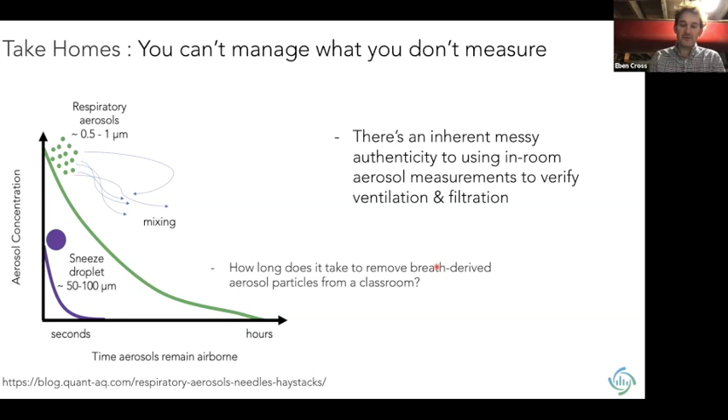It says the room is this big, the ventilation system is delivering this much air, it's removing this much air. You do some arithmetic and you get an answer, and it says the air change rate is X. I've found that by actually going into that same room and measuring how long it takes particles to leave, you often learn that the reality is different than the theoretical calculation. So the question is, what can we do about it?

So we built a technology called MODULAIR-PM, and it's just a PM sensor. I don't want to get bogged down in the details, but this thing is capable of telling me how many particles there are suspended in the air in that room, and also what size they are. So we can begin to differentiate those sneeze droplets from the breath-derived aerosol from the background pollution particles entering a space. That's quite helpful because each one presents a different removal target for us.

We want to take this same tech and put it into a classroom. I don't know if you guys can see my video, but this is one of the units. It's relatively small and unobtrusive, about 10% of the size of the printer in this picture here. That unit's been running in my daughter's first grade classroom since September of 2021. So arguably, this is one of the longest running continuous aerosol measurements in a real world classroom to date.

But if we think theoretically about that room and simplify it a bit, we can begin to think about the confines in which we want to define the problem. Really, this comes back to people inside a room - they generate a ton of CO2, and they also release respiratory-derived aerosol. If we were to measure the CO2, which is basically taking the world by storm thanks to Aranet's technology, we will see the rise and fall of that CO2.

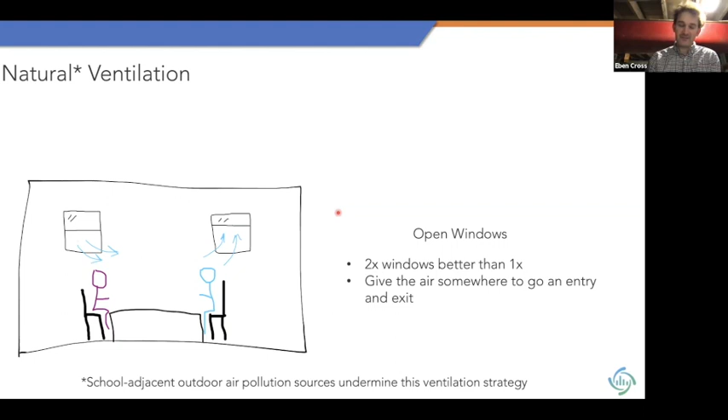And this is the vast majority of schools in America - they only have this at their disposal. They do not have mechanical ventilation. Now, when you add a mechanical ventilation system to this room, you get a little bit more of a closed system, and you should actually know what's going on.

This helps us relate some metrics within the ventilation system to what the air change rate should be, right? And hopefully that ventilation system embeds things like MERV 13 filters, which are decently good at filtering particles in a way that is dramatically improved over MERV 12 or MERV 11. I know in the UK you have different filter designations that Reese and Stefan can school everybody on. I don't actually know how these things link up, but I encourage you to reach out to them to know precisely. So we need that filtration layer, and we're pumping air into this room.

We can end up coming up with a theoretical air change rate based on the size of the room and the rate with which we're pumping air, positive pressure flow, into the room. So for this room, we're going to hypothetically say the air change rate is 6. All that is the total amount of air being pumped into the room divided by the volume of air held within that room.

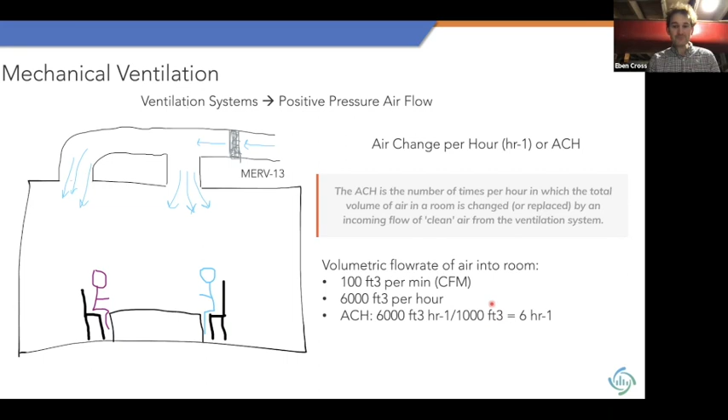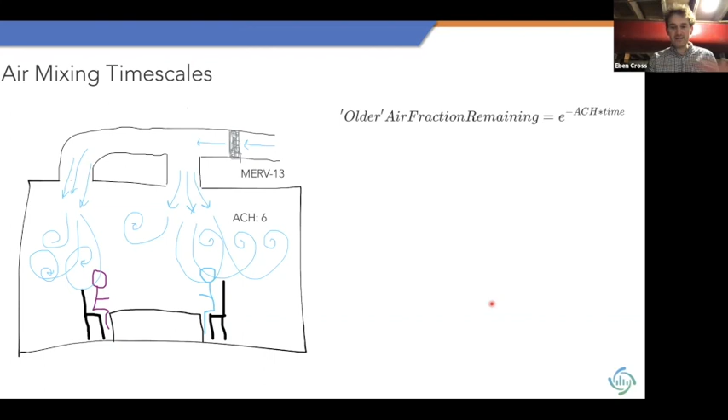But if we think about it, air doesn't move like toothpaste through a tube. Air mixes all the time. One of the confusing things about ventilation and removal rates is this mixing. And because it's constantly mixing, it doesn't decay in a linear fashion, it decays in an exponential fashion. On a graph, that means over time the fraction of air exchanged goes down something like this green curve, or you can think of the input of fresh air into that same room going up like this blue curve.

So in this case, our 6 ACH - and by the way, 6 ACH is the target for all school classrooms. The reality is in America it's closer to 1 or 2 ACH. But even in a case of 6 ACH, it takes 30 minutes to clear the room of 95% of the air. So we're looking at half an hour to get to 95% clearance because of this mixing, if the room had an ACH of 6. So 30 minutes is essentially the best case scenario we could offer our kids globally.

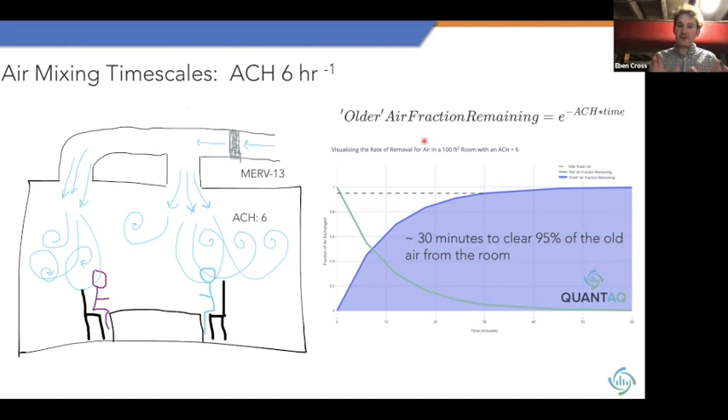So the question is, how do you get to 6? This gets into the concept of using aerosol measurements to understand the room a little bit better. One way we can leverage those aerosol measurements is we can add a humidifier to this room, a little droplet humidifier, and you can create an aerosol distribution that includes particles overlapping in size with the things we're trying to understand the removal timescales for. And then we can use that data.

So I'm plotting the actual number of particles in each cubic centimeter of air when that humidifier source is on - these are the droplets being generated by the humidifier. I'm using the system to count up only the particles in one size bin, the particles between 350 and 460 nanometers. These are pretty small particles, and they tend to overlap with that respiratory aerosol distribution, at least the smaller size tail of that distribution. But the key thing is we can use that data to calculate how long it takes those particles to go away in this specific room under these specific conditions.

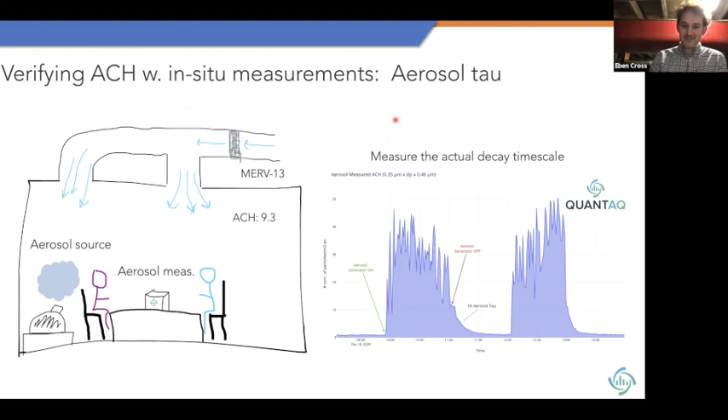You'll note I changed the ACH here to 9.3, because I did this exact experiment in an actual room, with an actual back-of-the-envelope calculation based on the theory of the ventilation system. But because I have that empirical measurement, I can then actually move forward if my slide was capable of moving forward. Oh, technology.

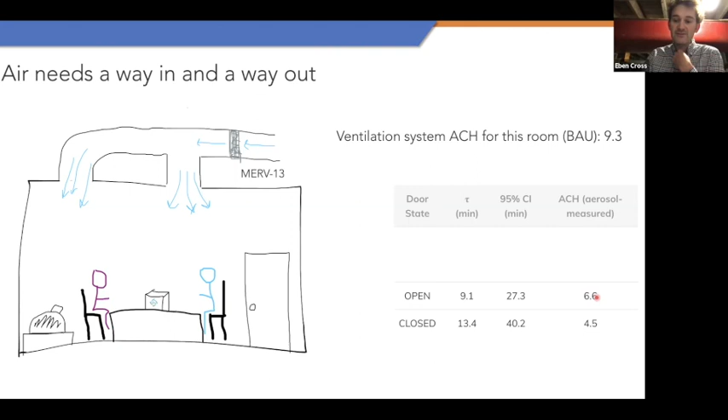There it is. And we can actually ask ourselves, did we get to that business-as-usual 9.3 for an ACH? When I actually measure the ACH, if the door is open, this room gives me an ACH of 6.6. If the door is closed, the ACH is 4.5. So we're literally missing the mark here by 30 and 50% respectively. And it's telling me that leaving this door open to this particular classroom is incredibly important, right? So we have to think about this in terms of the practicalities of the disconnect between what the ventilation system says is happening versus what's actually happening inside these rooms.

So this is just highlighting the reality - if we make the measurement, we can really firmly understand and trust that removal timescale, and potentially do things that are accessible, like opening and closing a door, that can in fact have a fairly dramatic impact on the ventilation rate.

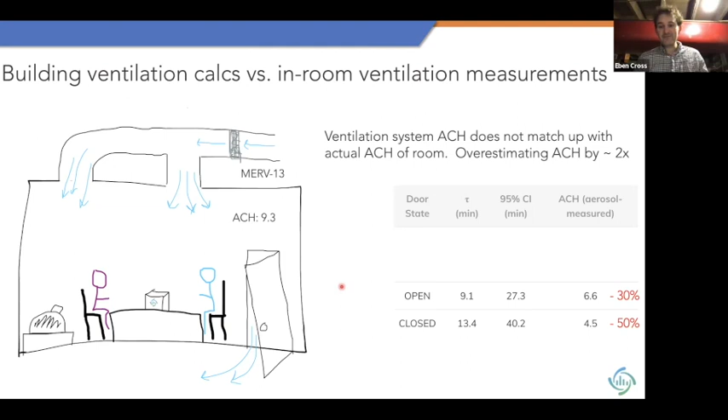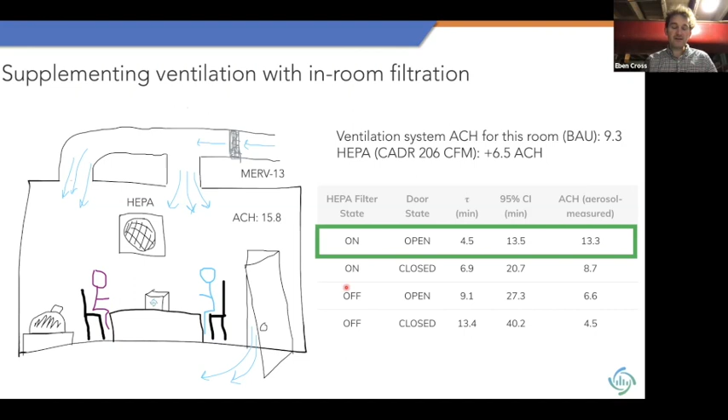The other thing I did in this experiment is I added a HEPA, a wall-hanging HEPA, not a CR box. The HEPA is supposed to theoretically add another 6.5 ACH to this room based on its operating conditions, meaning I should be able to hit this target within this specific room of 15.8. You can see we get pretty close. The HEPA actually does operate to spec if we leave that door open. If we leave the door closed, we really aren't even getting close to that theoretical ACH with the addition of the HEPA. So all I'm saying is, we have these things at our disposal, and thinking about how air enters and leaves a space plays a key role, and making measurements allows us to understand what's going on in reality.

So with all that as context, we want to move towards how do we maximize the in-room filtration of particles, whether they're from pollution or from people, and empower people and communities who are generally under-resourced to minimize their kids' inhalation risk and dose.

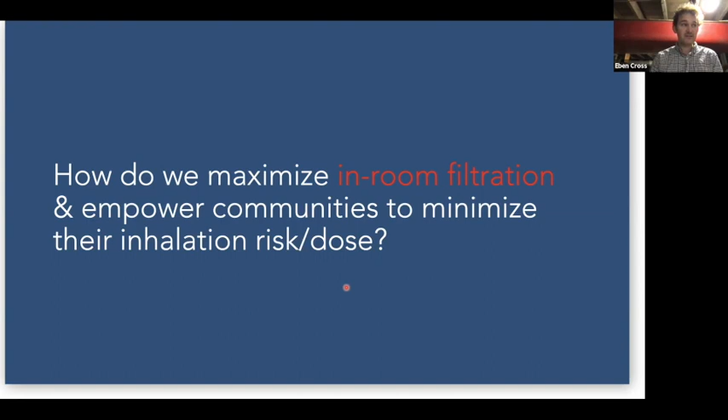I think the bottom line here is that what has happened with this Corsi-Rosenthal box, what I call the Corsi-Rosenthal box revolution, is a perfect example of accessible science. Frankly, I legitimately think accessible science is best drawn with fat crayons and modeled with Lego, because we don't need to make this complicated, scary, or intimidating. We can make it accessible, we can make it affordable, and we can deliver ridiculously high clean air delivery rates with these devices.

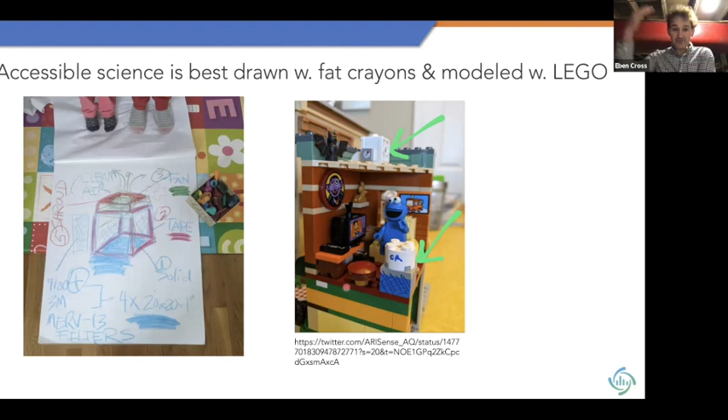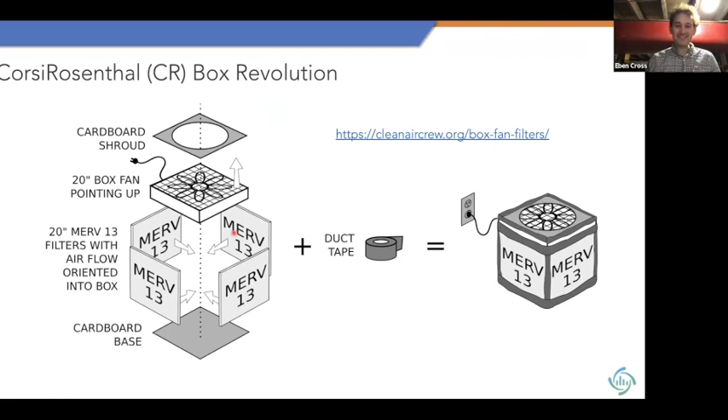That's pretty awesome. What makes it even more astounding is if you take that system into a lab space. So this is me taking the thing that me and my kids bought and bringing it to my lab. In my lab I have a chamber that's like a simulation room, and in that chamber I can create and sustain really high concentrations of the target aerosols we're trying to filter. We're plotting the total number in one of those size bins, and watching what happens in the chamber when I have a constant aerosol source, and then what happens when I turn on the CR box at different speeds.

One of the questions we have with the intervention is: is it going to make so much noise that nobody ever uses it? Frankly, if you run a CR box on medium or high, the answer is yes—it's too loud, people will never use it. If you run it on low, it'll actually be fine, so we should focus on the benefits we get when running these systems on low. In this experiment, I wanted to emphasize that I'm getting two pieces of information every time I turn the CR box on.

Eben, you've got a question. Sarah's interrupting you. Sure, can I interrupt?

Thank you. So when you say not too loud, can you give me an idea of what not too loud is? Is this hair dryer loud, or what do you mean? So it gets back to the question that Stefan's done a ton of research on—decibel levels and how to get them quieter. It's in the vicinity of 49 to 50 dBs, which is background noise unnoticeable in the context of a first grade classroom. I walked into my daughter's open house two days ago and could hear the $700 HEPA, which was on high, loud enough to hear across the room full of adults and kids. But the Corsi-Rosenthal box, on the other corner of the room, was completely inaudible, but it was still running on low. So the thing is, it's not noticeable.

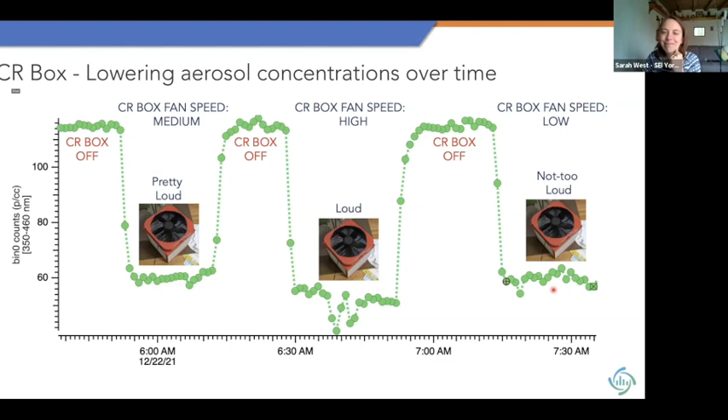I actually think this graph can be a little confusing, but I wanted to help you understand there's two pieces of information I can get from that experiment. I can understand what fraction of the particles were trapped by the filter, or removed, as a function of the size of those particles.

Somebody raised their hand. It was more of a question on the noise again. I wondered, the fact that we're using an axial fan here, the action is to move air through a filter, but because these fans are designed to move air through vents which have very little resistance, I wonder if the noise might be reduced by using a different kind of fan.

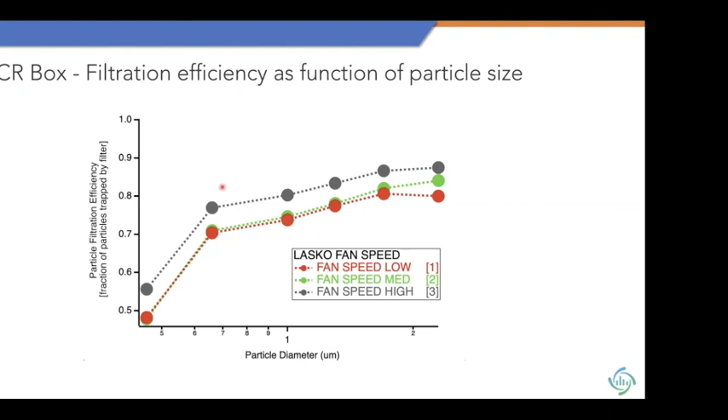The fan I mentioned in the last talk was the centrifugal fan, which is kind of like a mill that's powered by a river. The fan blades are perpendicular to the flow. This is potentially much quieter than an axial fan because it's not chopping through the air, it's pushing the air, and it might be more efficient.

I think generally, whatever fan is operable, quiet, and moves a ton of air is the winner. I don't care what kind of fan gets integrated, as long as the device is used, that's a win.

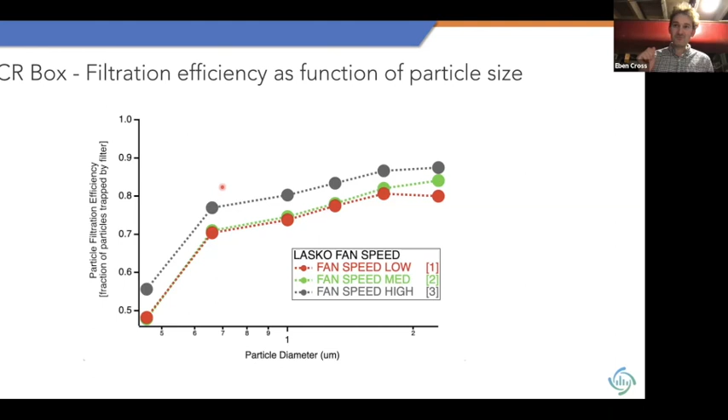So in America, it's possible to build infinite degrees of permutations on Corsi-Rosenthal boxes. But if my fan can get to clean air delivery rates that look like this, and nobody can notice that the fan is actually on, we've won. And I don't care what kind of fan it is.

I need people to be able to build it, deploy it, and turn it on and use it. And if those three factors are met, and we're able to reach these levels of clean air delivery at that lowest unnoticeable noise level, then that's a win.

In different markets, like the UK, you're subject to different supply chains with different available hardware. It really comes back to that trifecta: can people build it, is the price point accessible, and are they going to actually use it? If you can meet those, then it's a win.

This plot is really trying to show that ultimately, the only metric that matters from these devices is the clean air delivery rate. The clean air delivery rate defines the combination of how much air is moving through the device and how efficient the filters are at filtering out the particles.

The thing that's different about this plot compared to other CADR plots you'll see is that I'm explicitly measuring the clean air delivery rate relative to the filtration efficiency for these specific size particles. We can do that because we have the device, it counts particles, it sizes particles, and I can explicitly quantify the removal of all these different size particles as we change the size of the particle and change the speed of the device.

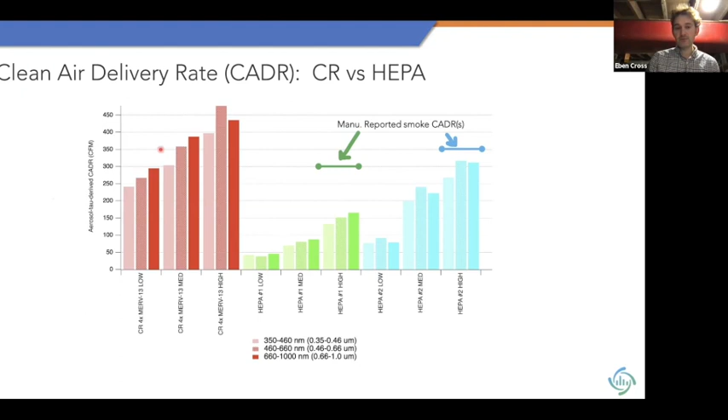And that is ludicrous, right? So we have to be able to help people access and deploy and use and benefit from these types of tools. From my perspective, I've only done a little bit in this space.

I've just basically tried to use Twitter as a tool to speak truth to physics, speak truth to aerosol physics, and come back to some sort of common sense metrics that schools can deploy.

This device, which I named Gus, I deployed in the heart of the Omicron wave into this one classroom. It looks like this after just 4 weeks of running 24 hours a day, seven days a week, and only running on low. And clearly it's capturing a ton of particulate matter.

Sorry, someone trying to... okay, I'll just keep going.

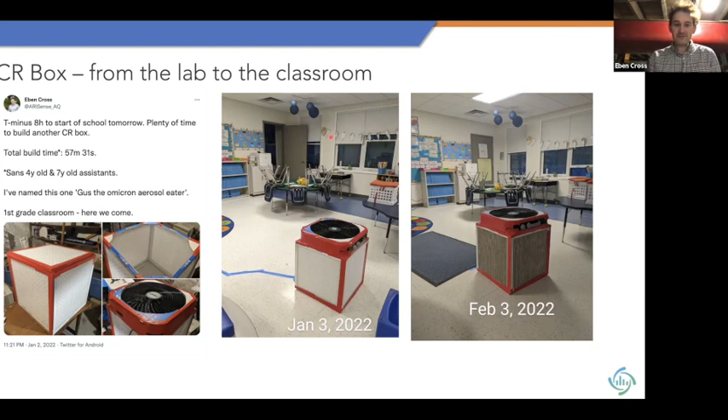So essentially, it's delivering clean air. It's helping lower the inhalation dose of the kids in this classroom in a fairly substantial way relative to the interventions that were deployed previous to that.

Ultimately, I think a lot of the barriers to adoption come back to: is it safe? Is this thing going to spontaneously combust? Where is the certification around the device?

There's a lot that's out there that you can use. The EPA has published this evaluation. There are certifications that say it is safe, and there are large agencies, including the California Department of Public Health, that are suggesting that this is an effective tool.

There's manufacturers that actually understand and can leverage this as both a business opportunity as well as an opportunity to do good. And 3M is not unwise to that.

I think what's so remarkable is how the community in general has scaled the approach, and people have been able to fundraise and we're able to deploy hundreds of units into districts, and those districts and the kids in them are breathing cleaner air, and they're catching less COVID.

Ultimately, I think this all comes back to that fundamental take home, which is: how can we take a classroom which with business as usual might keep the aerosols in it for 2 or 3 hours that are breathed out by everybody in the classroom, and convert that 2 to 3 hour time scale down to a 30-minute time scale.

If we do that, we're having a dramatic impact on lowering their inhalation dose. And the really amazing thing is, it's also crushing the air pollution concentrations in these same classrooms, especially in places where you have to keep the windows closed because of the proximal nature of air pollutant sources relative to the school space, right?

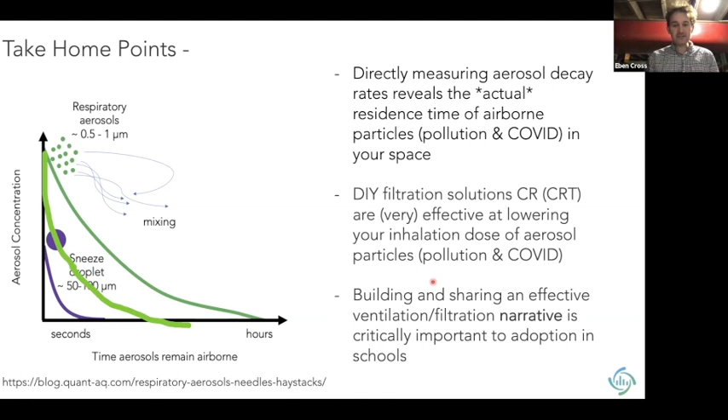to change. And so the last thing that I can speak to here, and I want to be sensitive to having lots of time for questions, but when I first went into that elementary school, I racked my brain as to how can I communicate in a simple and understandable language to help people improve their ventilation.

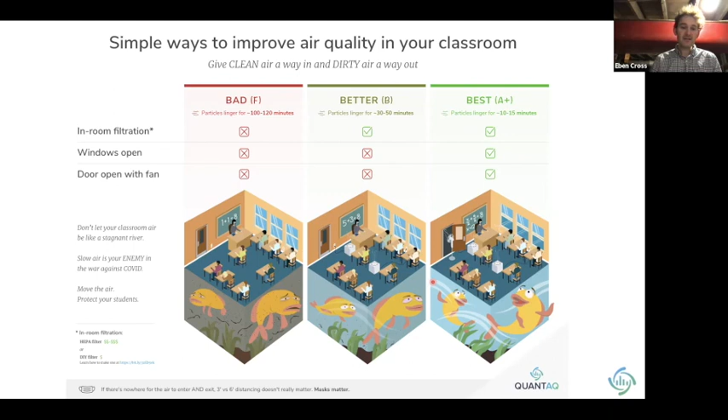I saw the opportunity, at least in school environments where they only have windows and aren't located in areas pummeled with local air pollution—opening those windows, having a fan pushing air from the classroom through an open door, can have a dramatic impact on the air change rate of that room without any other filtration interventions. I tried to convey that with this fish poop analogy, getting people to think of their classrooms as underwater, where the water is either stagnant or moving, and whether it's moving is really up to the controls you have at your disposal.

And this is my 6-year-old's hack at trying to convey that. So I really do appreciate the interest and the opportunity to share some of this work. There's a lot more that could be learned from what we're seeing in the data, and I'm happy to elaborate on some of those lessons if there's time in the Q&A.

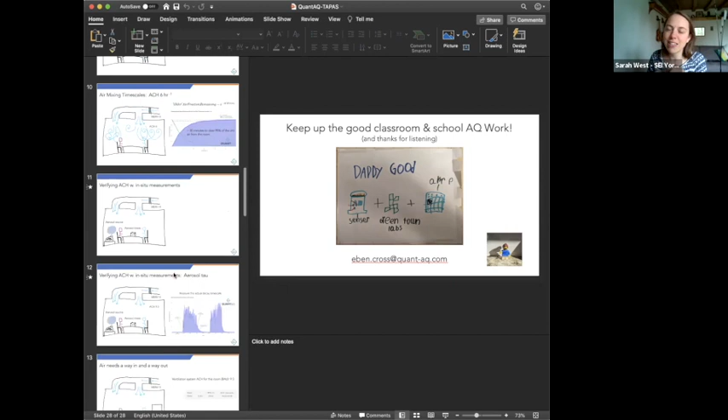Yeah, thank you. So it was just a question about why do you think people like that kind of traffic light? You said that the traffic light is much more appealing for people than the amount of time it takes CO2 to leave. Is it just because it's simpler to understand, or do you think there are other reasons why people like that more?

I think generally the average human doesn't like to fit an exponential decay curve, because that's actually really intimidating and not accessible. So I was actually thinking of the analogy of an escalator, helping people understand that air doesn't move like humans down an escalator at a constant rate—air is leaving always the same. Instead, the escalator is a linear decay, whereas the exponential decay is this weird shape.

Frankly, it's because they take the CO2 monitors wherever they go—they never leave them in place, so they don't actually capture the decay. They're just inside the classroom and the CO2 is really high, then they go out to the playground and the CO2 is at background. There's no information in between the two—it's a binary change in their environment. So if we could just encourage a couple of the parents to let the CO2 monitors stay in the cubby, you'd learn a lot more about the classroom.

I think people can see this, and it happens on airplanes all the time—everybody's tweeting about who can break the record for the worst CO2. They can grasp onto that multiple thousands of ppm and it being sort of an unambiguous signal that air is literally just not moving from this space. So it's really a stagnant air indicator.

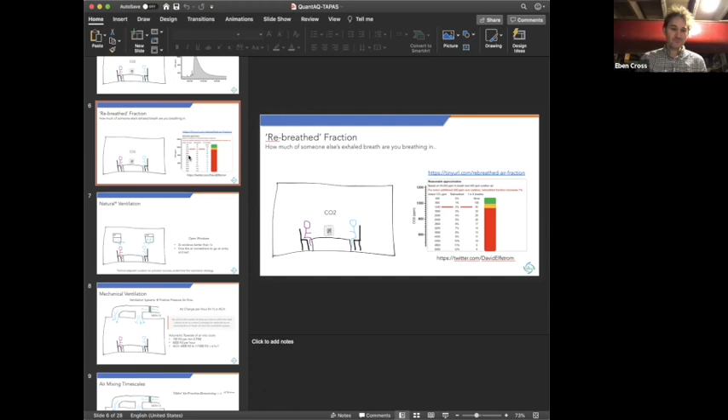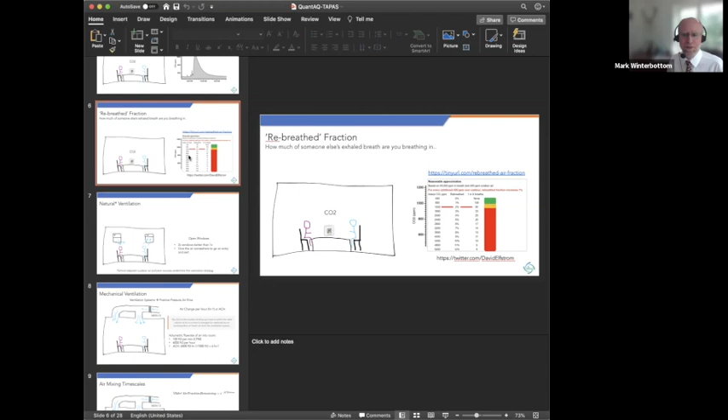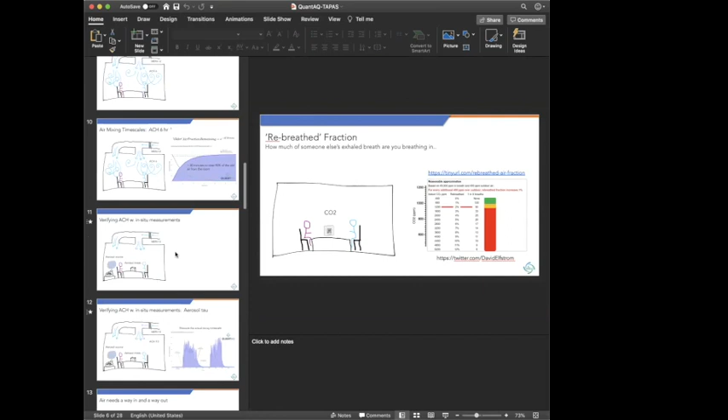Yeah, hello, I don't know if you can hear me. Sorry about the delay. Very interesting to hear about the possibility of cleaning air. I'm a bit concerned about relatively low efficiencies of filters and relatively high levels of recirculation of air. I'm just wondering if it might be better to also consider higher efficiency filtration and less circulation of air, which might be better if you're talking about infectious particles, for example.

Right, yeah, so that's why I was motivated to make this plot. This is literally telling you that even though I only have MERV 13 filters on my Corsi-Rosenthal box, which have a known filtration efficiency for a 300 nanometer particle of about 50%, I can still, at a 350 to 460 nanometer size, outcompete a 99.9% efficient HEPA filter, because I'm moving so much more air per unit time through those MERV 13s than the HEPA is moving.

So this is a 99%, 99.9999%, however they want to market it - a device that literally will remove all of the particles, but it's literally passing 100 CFM as opposed to 300 CFM. So we're overcoming the differential in filtration efficiency by massively exceeding the flow.

I can understand the overall benefit, but the redistribution of those particles may lead to further infection. Surely, if they're sort of swirling all around the room, you've got clouds of aerosol particles that are being swept up into the air again, rather than having the chance to settle out in a much quieter, more controlled airflow pattern.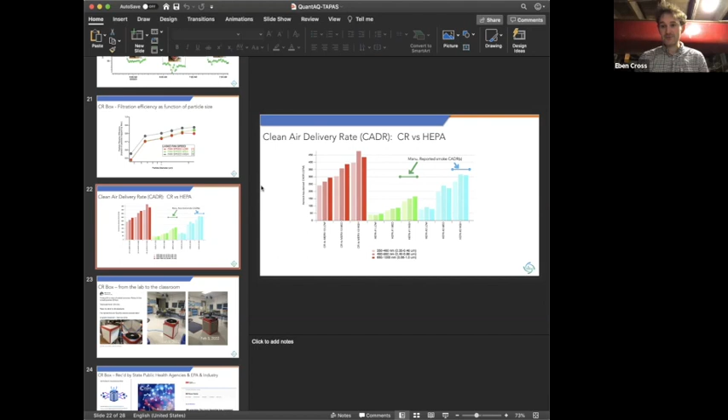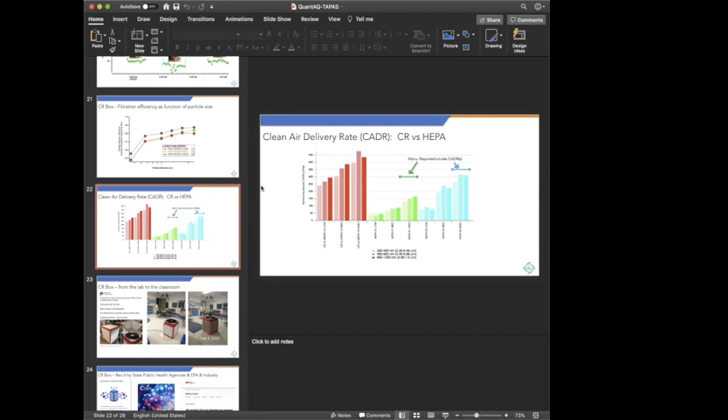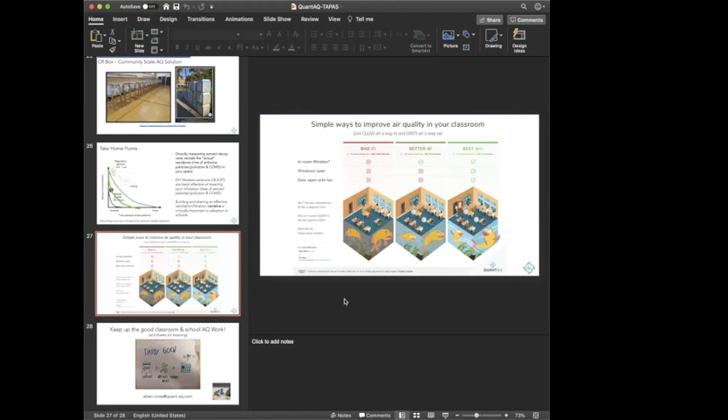I was wondering about the NOx emissions that come from traffic, because if you open the doors and windows, I wonder if that might flood the classrooms with NOx, in the sense that NOx can't be filtered out from the box.

Would schools know if they're in a situation where they should or should not open their windows because it might be next to a road, and might the best strategy for them be still having ventilation but putting a green wall up, for example?

Yeah, I mean, I think generally, if we can get to a space where everybody sits at this B grade and adds in-room filtration devices and keeps these windows closed, that is the best case scenario for a lot of conditions. This is true in extreme temperature situations—very cold, very, very hot. It's true in wildfire conditions, and it's true in traffic adjacent high NOx, CO, combustion tracer emissions.

It would be far more effective to add a second in-room filter and keep those windows closed than it would be to build a green wall. It would also be a lot less expensive. So again, it comes to a mitigation layer at the policy level, where you're trying to eliminate idle zones in close proximity to schools. I know that happens a lot more in the UK than it does in the US. I just biked to school with my first grader, and I'm biking past the no-idle signs and a fleet of idling cars, because parents just don't care.

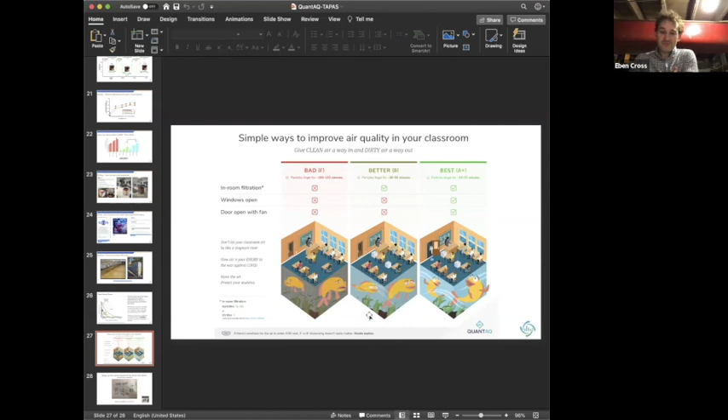So I wonder how schools might know what they should do. I mean, to some extent, you got to use their intuition, their air intuition and their noses to know that there's a significant idling combustion source nearby, and everyone's better off at certain times of day, certainly leaving those windows closed when those emissions are highest.

Also on slide 23, I think it was - yeah, slide 23, you've got the kind of before and after box. After a month, it looks pretty dirty. Is this because it's trying to effectively clean the outdoor air? Or is it because the room in the classroom was that dirty over a month? And also, was the box still efficient when it looked like that? How would schools know when to make a new box?

Yeah, so this is an excellent - there's a number of excellent questions. The outdoor air in this environment is generally very clean. This is a school that's basically in the woods, and there's very little wood burning happening during the winter. So most of what you're seeing there is the resuspension of dust and sources of dust from the students in the classroom getting trapped on that filter. That's primarily the discoloration, as well as everything else that's happening in that space.

The efficiency of the system is something we need to test, right? That system's now been running continuously for almost 6 months, and I'm going to grab it at the end of the school year, and I'm going to rerun all the CADR experiments, and then unambiguously we'll know whether or not the CADR and the filtration efficiencies have dropped as a function of the actual material on the filters. Generally speaking, I think we aren't going to see a difference there for as much as, say, a 6 to 8 month run in this kind of environment that doesn't have a lot of really high air pollution.